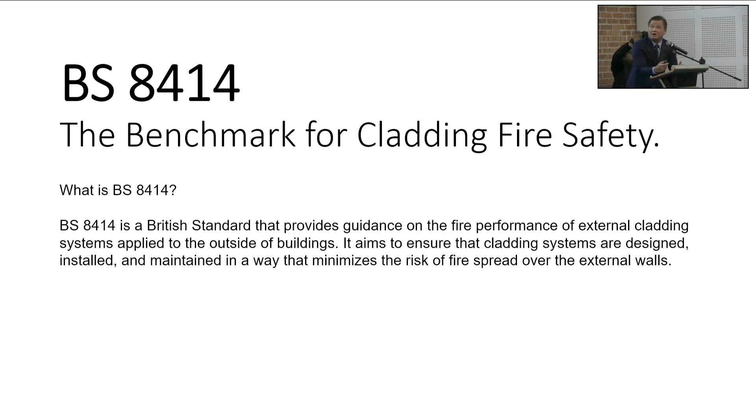Now, why was it implemented? In my next slide, I will show you that it has been gazetted into our law that it has to be adhered to in our UBBL. Why is it so important? What happened is that fires have been occurring in high-rise buildings for the last few years, and probably one of the most popular ones that you have heard of is the Grenfell Tower. Grenfell Tower happened in London, UK in 2017. And in the UK, we always think that they are a modern country that should have enough firefighting systems to stop fire happening in high-rise buildings, right?

So what happened in this building is on 14 June 2017, at 12 midnight, because of just an electric circuit short. From what I learned, it was from the fridge in one of the units, and fire broke out. The fire spread initially in the unit itself, then it spread out to the external wall, and then within an hour, 1.5 hours, the whole external wall caught fire. In the whole incident, 72 people died, and 74 people were injured. So it's a serious matter, right?

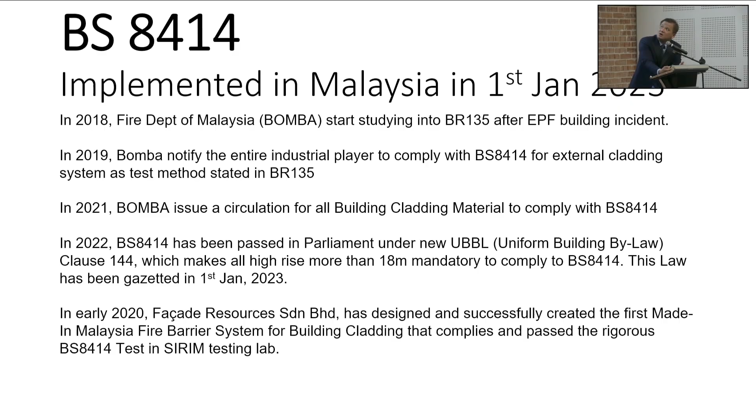For us in Facade Resources, when we were told in 2019 that Bomba was looking at gazetting BS 8414 as one of the requirements for external wall cladding, as an industry player that has been very active for the last 20 years, we felt it necessary to come out with a system that Malaysian industry players can use. And most importantly, it must be effective and economical as well. And that is who we are today with the system.

Now, one of the things that I need you all to know is when you need 8414 and when you don't need 8414, this is also very important. I guess some of the architects here deal with high-rise buildings, some of you don't, right? So one number that I would like you to keep in mind is the number 18. Not because of sweet 18, it's because of 18 meters. As long as your building is above 18 meters, then you need BS 8414 for your external wall cladding. What about below 18 meters? Bomba has requested that below 18 meters, you just need Class O to comply with BS 476 Part 6 and Part 7.

I've seen so many buildings quite nicely done. That's why we have to compliment our local authority. Because I have development in Cambodia, I can share with you, we have buildings that can kiss each other. Basically, my neighbor, I can just extend my hand and shake him. That's how it works in other countries. But luckily, in Malaysia, we don't have that.

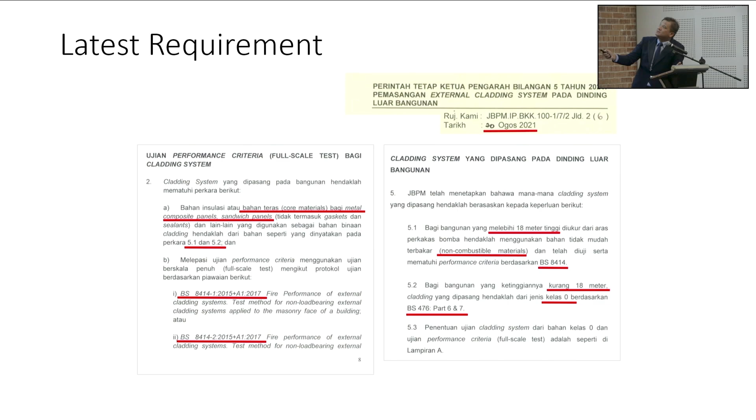So this is the Perintah Tetap Ketua Pengarah Bilangan 5 tahun 2021. This is the Pengarah, and this is where the instruction is. So if you look here, it's stated that for bangunan melebihi 18 meter tinggi, using non-combustible material and berdasarkan BS 8414. If kurang 18 meter, Class O, BS 476 Part 6 and Part 7.

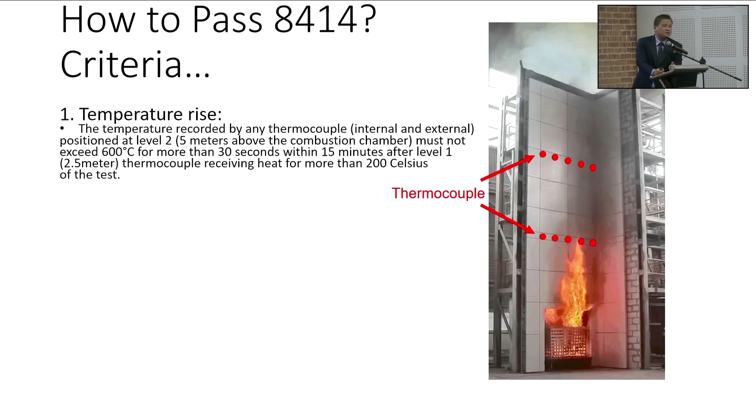So let's say at 7 minutes it goes up but comes down? Yes, as long as it's not for 30 seconds. Just 1 second, tak apa. 2 seconds, tak apa. But if you break 600 degrees Celsius and it registers for more than 30 seconds, then you fail. Understand? A bit technical, but don't worry, I'm here to help. If you don't understand, you can ask the question again later, or you can look for us. But this is how it works. That's the first one.

The second one is the visible flaming. This is more of observation. Basically, they want the whole rig here to literally stay there. The whole test rig is still there, and the fire is still confined within this area.

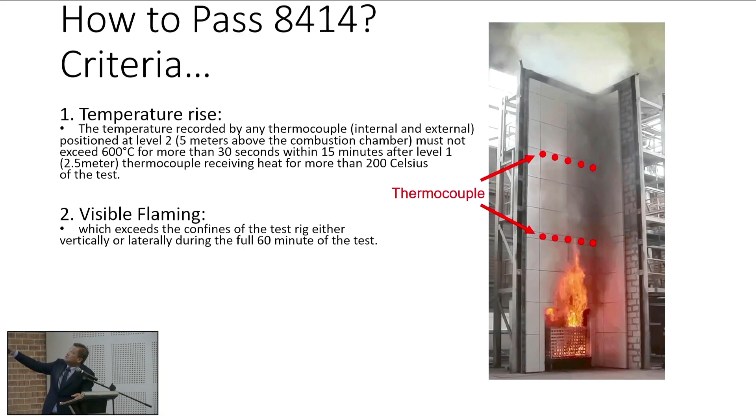It's not like going there or there for 60 minutes during the whole fire test. Next, falling debris. So, as you know, this is a wall cladding. It could be aluminum, it can be steel, it could be anything. So when we burn aluminum at a temperature of more than 300 degrees, it will start to collapse or start to melt. So all the debris will start to come down, especially the part of the system inside that could have something, rock wool, or whatever it is.

It will fall out. So this debris, when you burn, when it falls to this confined area here, continuous flaming debris is not permitted. So it must be able to self-extinguish in 60 seconds. If it drops here, in 60 seconds it must be gone. If after 60 seconds there's still debris, it means you fail.

So why is this important? As mentioned, this is a system test. And imagine this is a building as well, and people are running out of this building. The idea is, first, they don't want this debris to fall on the people. And number two, even if it falls down, it will self-extinguish so that you won't burn the people, providing enough time for the people to leave the building, to run away from the building.

And number four, there is no collapse of the system. So there cannot be more than 500 mm length of product or 200 grams of product, flaming or not, onto the floor of the test facility outside the designated crib zone. So nothing from here should collapse structurally as well. So, clear and simple. If you get that, you got it done, congratulations. You got your BS 8414 complied system test.

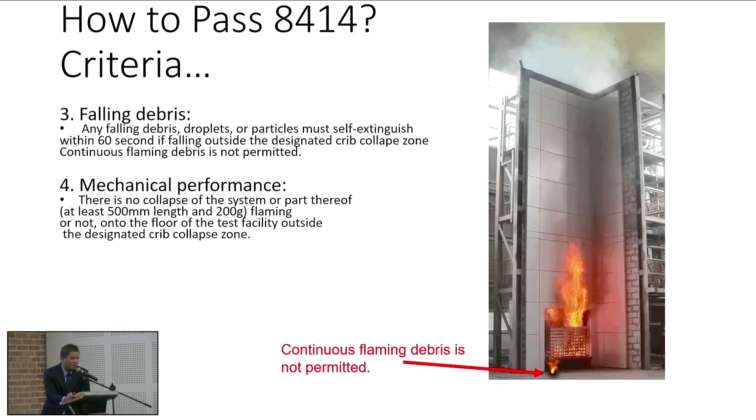Now, I'll just spend the next 5 minutes talking about the idea of 8414. Just like many fire standards or fire tests out there, the idea of 8414 is what we call compartmentalization. Just like when you have class O, when you set up a building internally, sometimes you fix up a firewall or a fire door. What are you trying to do? You're trying to contain the fire spread within the floor. Am I right? That's why you do all this.

In our facade, it's the same thing. We are also trying to compartmentalize, but what we are compartmentalizing is the facade itself. I will have a picture later to show you. But in terms of description, the idea is achieved by dividing the building into separate fire-resistant sections, or what we call compartments. Each compartment is designed to contain a fire for a specific period, allowing time for evacuation and firefighting efforts. So what does it mean? It's this.

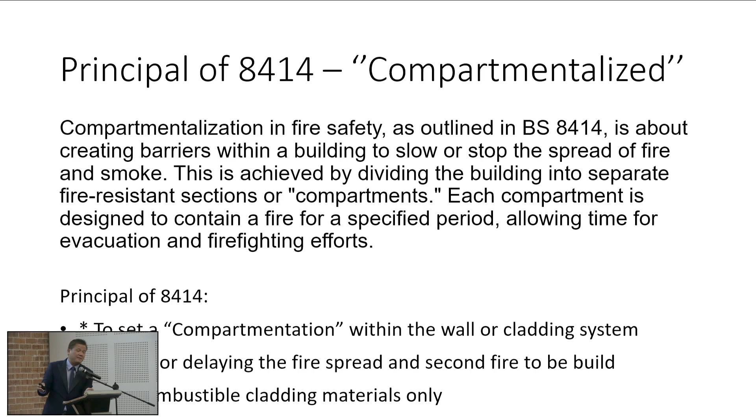So this is just a principle, to set a compartmentation within the wall cladding system, prolonging or delaying the fire spread, and definitely we are using non-combustible materials as well. So this is what I'm trying to say. Look, this is how a building normally works. This is how the facade is. Can you see the green and the red lines?

These are what we call the horizontal barrier and vertical barrier. This is what we are doing. This is our product; the red and the green is our product. So by compartmentalizing this place, when we build this barrier around this area, you basically contain the fire around this area, everywhere. So what is the principle of this compartment? There's a standard to do this, and it's very important for you all to know this.

Why I say it's very important is because in the industry it has been rolled out since 2023. Unfortunately, due to, I won't say lack of knowledge, but probably lack of experience and exposure, we have projects that want to comply with 8414. Yes, they do. But when it comes to the site, they didn't implement it as per the standard. This is how the standard should work. Some people actually have this, but forgot to build this, which is wrong.

So how do you know it's right? We'll talk about the vertical barrier first, which is the easier one, the green one. These are the vertical barriers. So basically, vertical barriers must be installed along all edges of the building.

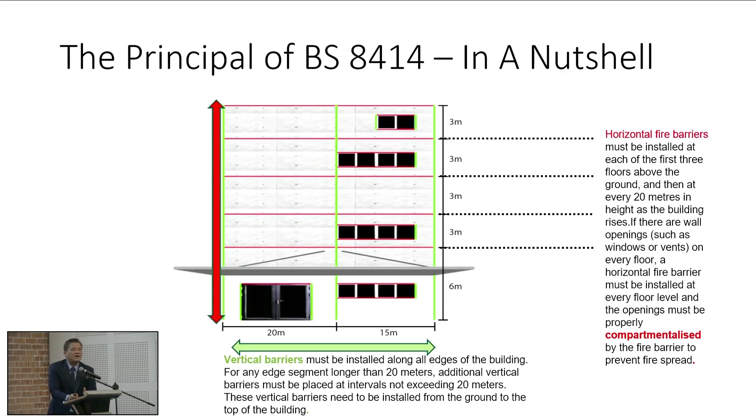So basically what I want to say is, it's easy to know that you are compliant. That's easy. But it's not easy to know whether you are complying correctly. That's the tough part. Because in the industry, there will be some people who interpret wrongly, will give you wrong advice, and tell you, no, you don't need to put here, you just need to put there. And that's all very, very wrong. So if you want to know the right thing, go back to our BS 8414 manual.

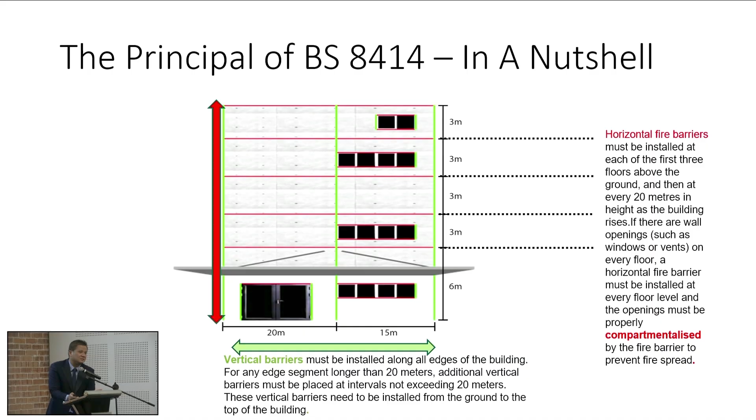So, okay, let's go to the next slide. So, why is compartmentalization so important? That's how it works. Can you see the fire? When you compartmentalize properly, we just tried a demo. You can see the fire is being contained. It's not spreading out. And that's the idea of it.

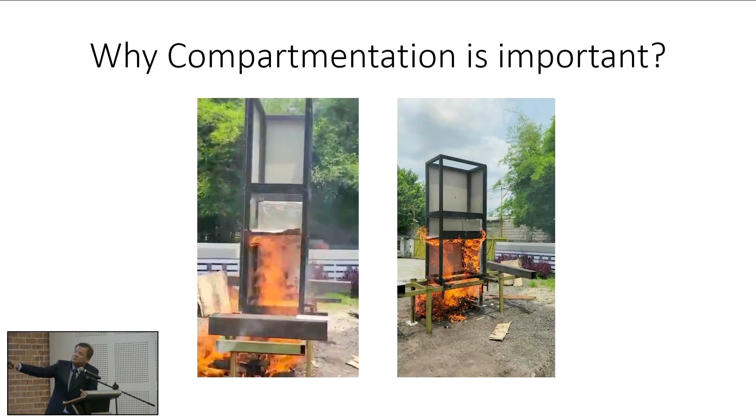All right? Because along this, we've put in some intumescent as well, the fire blocker, and we have some rock wool around this compartment. All right? So after burning, can you see? This is the intumescent that we had. So just to show you how it works. I forgot the picture, sorry.

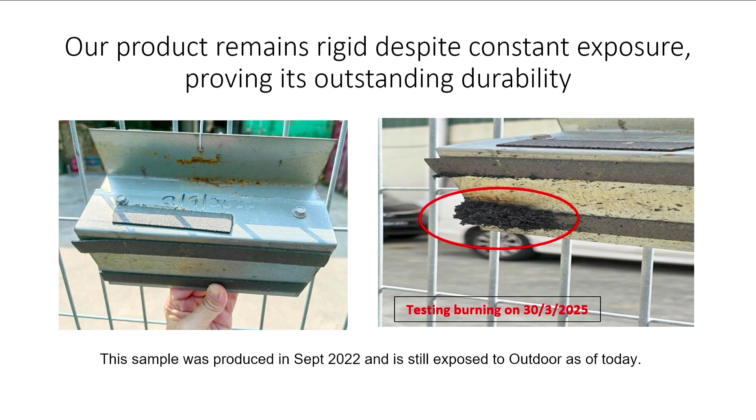So basically, this is our product that we took a picture of 3 years ago, September 2022. This is a picture we took just a few months ago. So once we do a test burn, this is how it looks. Okay, so this is the intumescent. Once it burns, it will grow when it heats, if I'm not mistaken, sorry, I cannot remember the temperature.

If I'm not mistaken, it's about 150 degrees Celsius. Then it will start to expand. If I'm not mistaken, I need to check back my data. So sorry about that. So when it expands, then it will become like this, and it will actually fill the gap. I will show you later in a drawing why it is important to have this intumescent.

Now, why I want to show you this photo is because of this. Can you see, this is the product that we have? Our product is very rigid. What do you mean by rigid? When we install this product on the actual site, sometimes in Malaysia you don't know what will happen, delay in payment, all these project delays, you know.

Sorry, so many la, right? Our Italian friend doesn't know what la means. But la is our culture in English.

Anyway, what I want to say is there's delay in projects. When there's delay in a project, this product will be exposed on site for some time. Imagine if it's 3 years later, how it looks. Because our product is very rigid, because it's made of steel, after 3 years you can see our steel is still very much intact. Basically, if this product is exposed for the next 3 years on site, there's no problem.

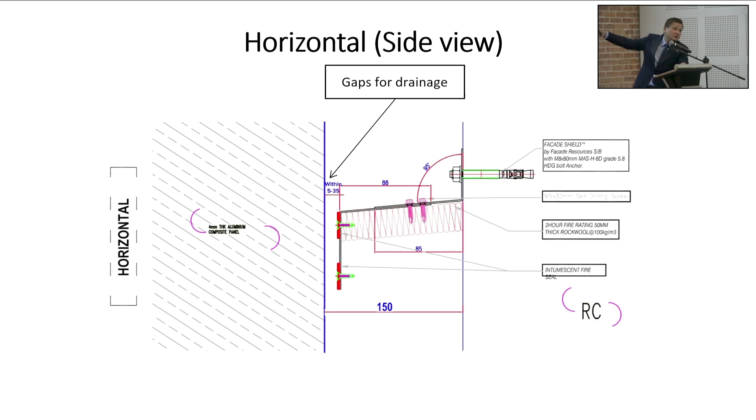This is how it really works. This is basically the barrier that you saw just now. This is the horizontal barrier. The way we design it is like a Z plate. The reason why we have a Z plate is because we want to be able to move freely. This is a barrier of 150. If, let's say, I have a 130 barrier, then I can just adjust the length here. So my product becomes very flexible and rigid.

Flexible in the sense that if you have a barrier like 130, I can just adjust accordingly by buying just one type of product. You don't need to buy 2 or 3 different products. But if today you have another product based on rock wool, you need to cut. We don't need to cut. We are there already, because we can adjust. And can you see the gap? We leave 5 to 35 mm.

This is the aluminum cladding. This is the aluminum panel. This is the wall. This is the barrier I'm talking about that you need to put inside the building. Just now, all the green and the red, right? This is the red one. So this is our intumescent. Why we leave this gap is that we want to create a rain screen effect. So, say, if water goes into this system, it can actually flow down through the wall cladding system, so it won't flood the system.

Have you heard of buildings where, once you clad already, suddenly the building becomes like pregnant? Have you seen it before? Why? Because water seeps in and it becomes pregnant. In Chinese, you call it DATO. So this is what we want to do. This is how we overcome it.

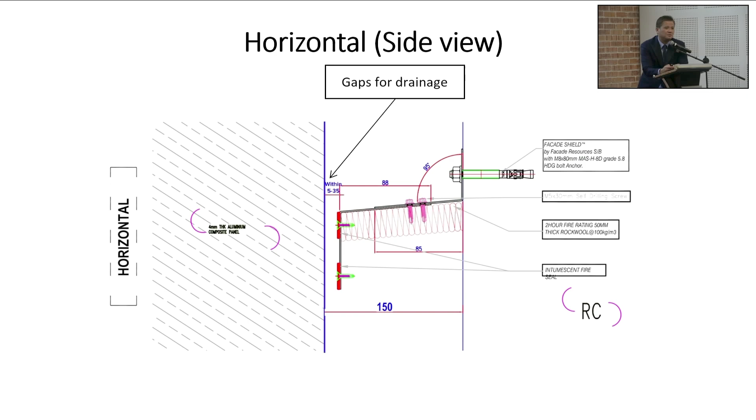This intumescent is only 2 mm, but when it burns, it will actually expand 20 times. So when our gap is 5 to 35 mm, will we be able to fill the gap? Yes. So the idea is, when there's no fire, the water can flow freely. When there is fire, the water doesn't matter anymore. You need to stop the fire. So you need this to pinch, close the gap, so that the fire is contained under this area. That's the idea. Very simple. But a lot of engineering and ideas have been put in.

And for the vertical, being vertical, you don't need the rain screen effect, so we can just fill the gap straight away. We have rock wool here, and there's no intumescent needed because it's dead anyway. It's like a compartment as well.

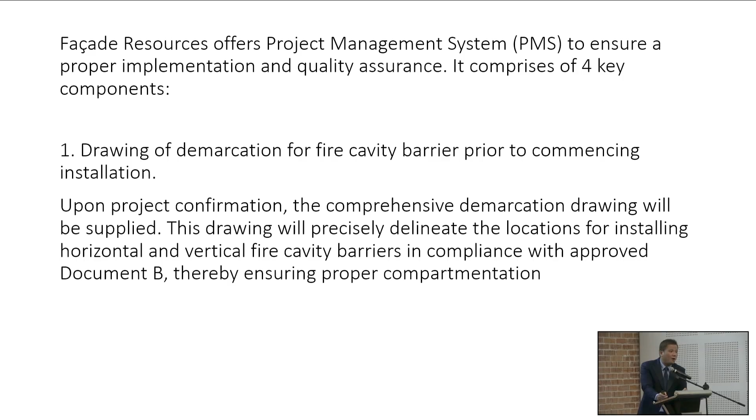Okay. So, what do we do in Facade Resources? As I say, the idea of 8414 is very, very simple. But did you get it right? And this is where we're going to help you. If you look for us, we'll make sure that the projects that you do are being demarcated properly. This is what we're going to do. We are with the Approved Document B as well, therefore ensure proper compartmentation. Okay? This is how it works. We'll do this for you.

So if you have a job, 18 meters and above, you need 8414.

We'll do this. Whether it's free of charge or not, give us the order, then we free of charge. No. For friendship, free of charge, I say. Okay? But I'm just joking.

Anyway, what I want to say is, this is very important. This is super, super important. Because I can tell you, in the market, a lot of people don't do this for you. Number one, the reason they don't want to do this for you is because they want to find ways to save money. And we're not going to do that. We're going to tell you this is where you're supposed to put your barrier, this is where you put your red one, this is where you put your green one, and you must do it. If you don't do it, then we're not going to give you the warranty.

All right? Remember, this is a very good business. I'm a special architect as well. You guys are the C2, right? Are you the C2 or C1? Who's the C1 already? Let me remember. C3. Okay? The material supplier, me, is C1. So if they don't follow this, I don't sign them. I don't sign them, they can't get their CCC. They don't get their CCC, that's their problem. So it's very important that this is being done properly.

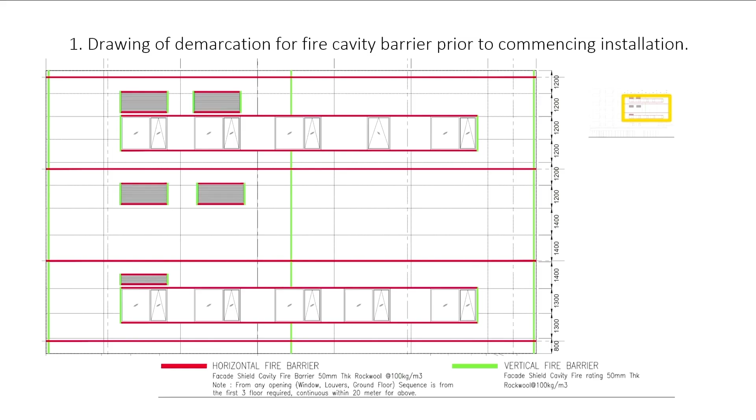Okay? So, as mentioned, we also do a cavity barrier review. We do work with some fire consultants as well to provide a report if, let's say, you need. Okay? And this is also important. We also do a QA QC report for the product that you choose. I think in wall cladding in Malaysia, most of the time they will use composite panel, if I'm not mistaken. But recently, solid aluminum is taking a lot of center stage as well. So we're going to do a QA QC of the solid panel and the composite panel as well.

The reason why we can do this is because of our background. Actually, Facade Resources was an agent for a few brands of composite panel before we decided to move into the fire cavity business. Now we no longer are, because we want to stand neutral. We have a lot of suppliers that work with us, which later I will show you, all the brands that work with us, which we have certificates with. And we're going to do a full detailed report on how good their products are.

Okay? And definitely number 4, which is very important, we're going to do a regular site inspection for you. This is part of our promise, and this is part of our job. You know, when we say regular, very simple, Dato, you just say regular. What is regular? I can tell you, we have a job, less than 100K of supply. It's in JB. We went down there 5 times. Less than 100K, went down there 5 times. When you divide, it's only 20K one time, but you must know we have costs as well. So this is what I want to tell you, how important it is to us that everything is done properly.

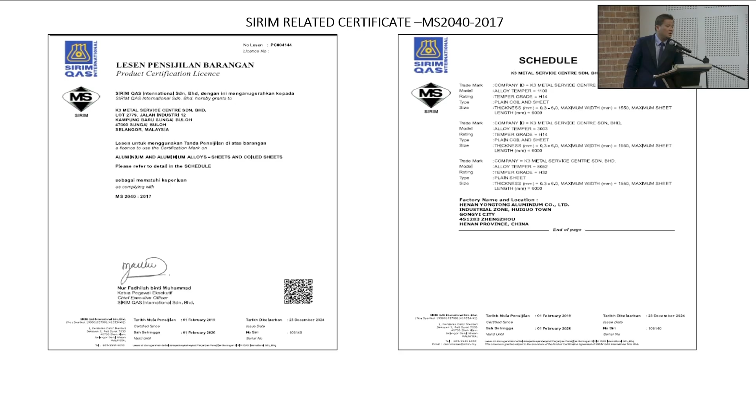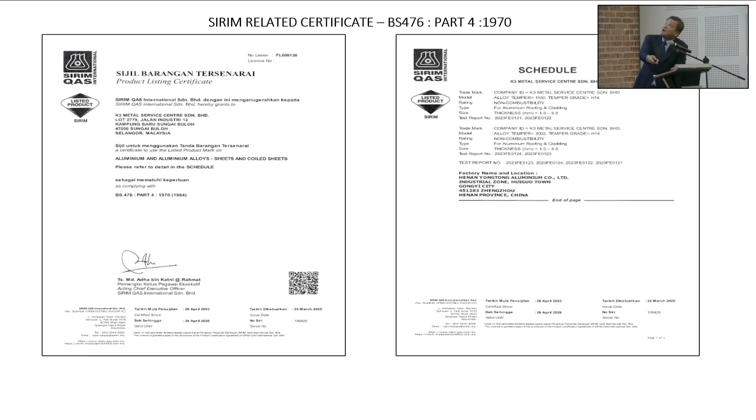Another very important thing you need to know is this: MS 2040. Recently a lot of projects are using solid sheet. Make sure their solid sheet has 2040 as well, because it's a Malaysian standard. With the 2040 you can have the schedule, therefore you can have BS 476 Part 4 as well. This is additional fire testing we do. And this is Class O, BS 476 Part 6 and Part 7, K3 aluminum. Passed. This is the date.

Bomba certificate. Why do we need this? Because all construction material must have PPS. A lot of people will tell you, I sell solid sheet, I have this and that. No, ask them: do you have CIDB, PPS? Do you have Part 6, Part 7? Do you have MS 2040? That's very important, because only with this whole set are you certified. And we use this product in our BS 8414 testing. This is just some of the documents.

Another thing I'd like to highlight: if you don't know whether the many certs out there are real or not, very simple. Go to the SIRIM website. There is a number on the cert. Just check. Definitely some people are going to do a lot of magic business here, I know. Just check from there. This is where I highlight the two parameters, 435 and 100, the minimum and maximum.

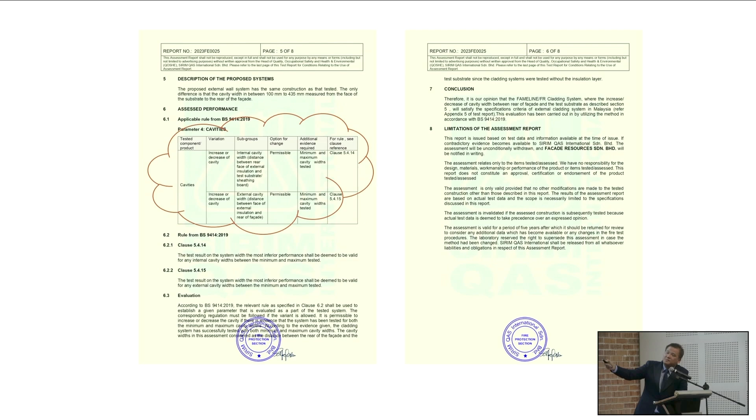Do you have time? How long do we have? Oh, 5 minutes. Can I? Okay. Just 2 minutes more.

This project is very unique. You know why? They got their CCC in 2018. Imagine, you already got the certificate. Everybody started to stay inside already. Then suddenly, they try to change some of the facade system because of a design issue. So the architect reissued and resubmitted. When resubmitted, it falls to 2019, then into 2020. What happened in 2020? The government says, I want to see your 8414 standard. But the building is already up. What to do?

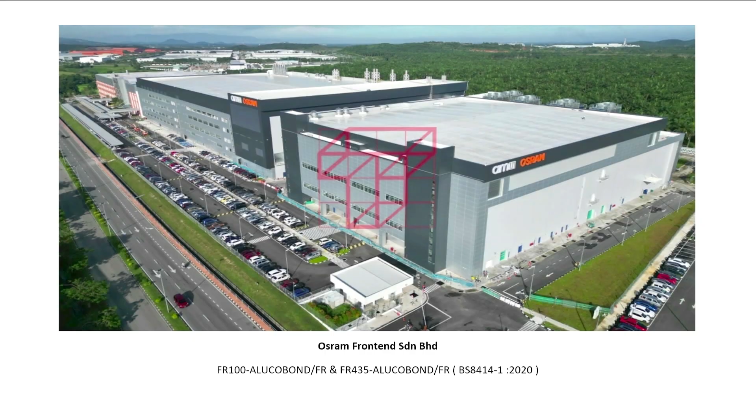This is Osram. And I think recently there's a lot of data center inquiry as well, right? So what about data centers, you ask us? I'm going to answer you very easy. If it's 18 meters and above, you need it. If it's below 18 meters, you don't need it. So if you want to save money, tell your owner, build 17.5.

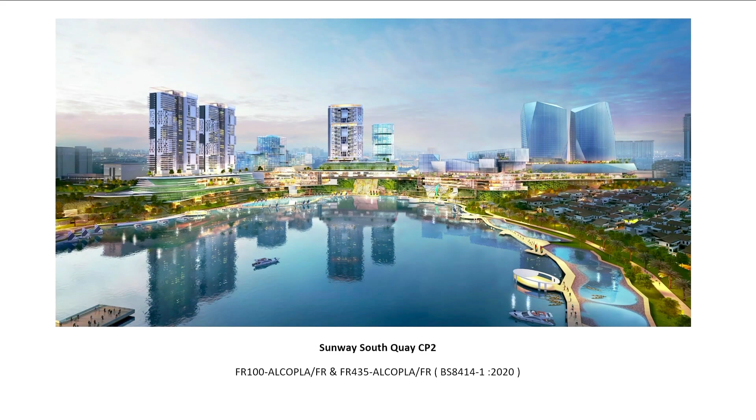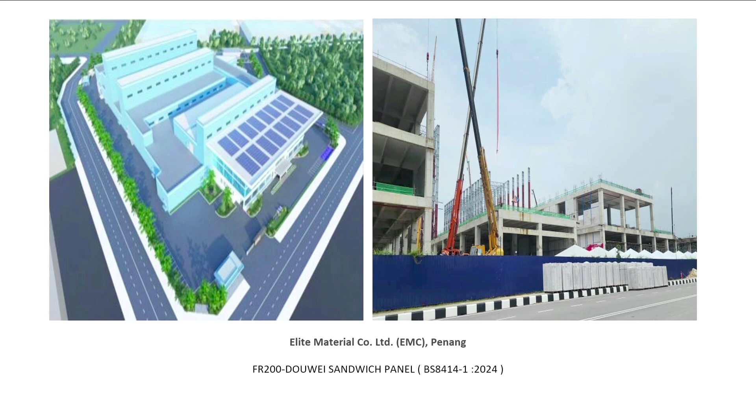They did a refurbishment. Okay, this is a very important thing that I'd like to highlight to everyone here as well. What I come to know is that Bomba is now looking at a lot of old buildings that need to be certified with BS 8414, or at least Class O, Part 6, Part 7. Because a lot of buildings built pre-1998, more than 18 meters, have no certificate at all on any fire testing. So now Bomba is looking at it.

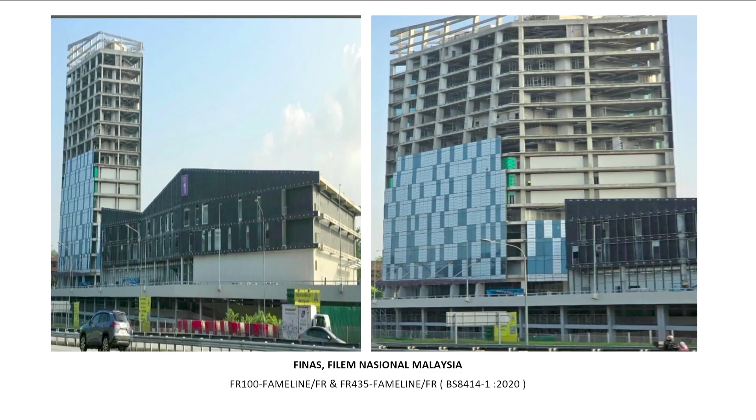So I just want to say this to you all because you're looking at a lot of job opportunity here for the architects. If you have a lot of friends, owners of 20, 30 year old buildings that need to rebuild, because they need to have this new certificate. If they don't, they're going to be paying a lot of premium in insurance, because it's not going to be considered a compliant building. All right?

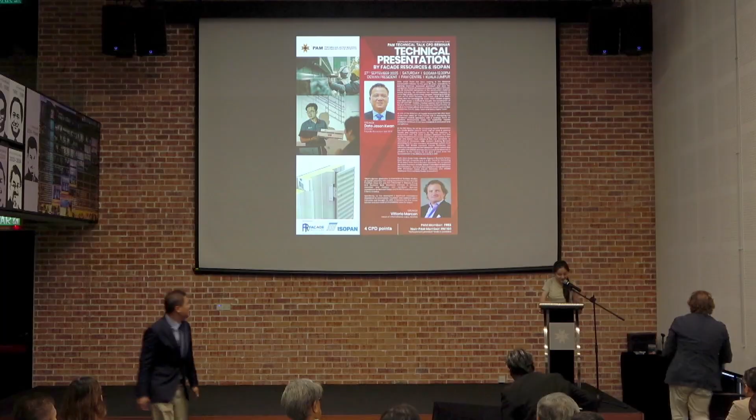Vittorio Marcon graduated in International Business Studies at Cardiff University with visiting experiences at NYU and EBS Frankfurt. Since the very first internships in Marzotto Group and Deutsche Bank, he developed interest in different industries and markets, with significant business experiences for Berndorf Group and Hirsch Group in Europe and North America. Specifically, he developed a significant international experience in construction, insulation, and sandwich panel industries, and brought his skills to become the first senior advisor and then head of international sales for ISOPAN.

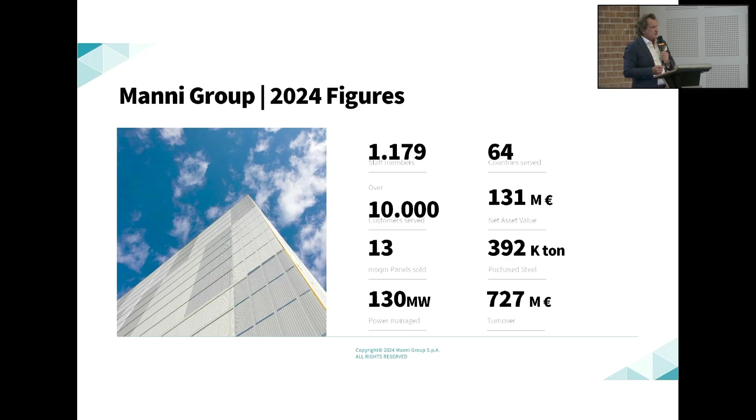In terms of sandwich panel, last year we delivered over 13 million square meters of sandwich panels. We process a lot of steel, both for sandwich panel and steel construction. Just to give you a glance, last year we processed altogether almost 400,000 tons of steel. And we developed a turnover of roughly 727 million euro.

Okay, here we are. Just a glance on ISOPAN and Manni Group. There are several companies within Manni Group. Manni Sipre is dedicated to steel fabrication and is one of the largest service centers for steel products in Europe. Manni Inox is focused on stainless steel application, trading and services. Manni Green Tech is a company developing its own philosophy of construction based on light steel frame applications.

And then there's ISOPAN, which you will get a special glance at later. And Manni Energy is taking care of designing, engineering, putting together and managing renewable energy applications. Here, let's go to ISOPAN. ISOPAN is one of the largest sandwich panel manufacturers worldwide, and we name it Building Envelope Solutions. And the mission is to fulfill the purpose of a responsible building concept, considering the well-being of the occupants and the positive externality of all the stakeholders in the community.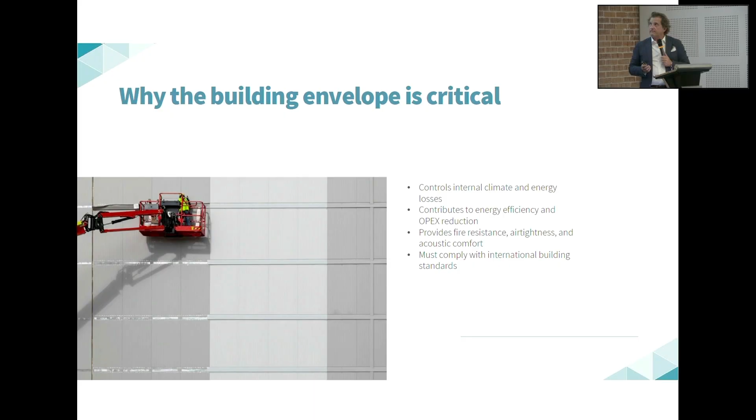Here we come with the certification: building protection with proven performances. The panels that ISOPAN manufactures are compliant with European fire protection norms, and as well with Factory Mutual approved sandwich panel regulation, both for PIR and mineral wool core panels, even if the focus is now mainly on mineral wool.

Just for your information, out of the 15 million square meters of sandwich panel production, we can adopt basically most of the well-known insulation materials, starting from the basic PUR, getting into PIR, with ultra-performing features in terms of insulation, and then we have rock wool, and we still have some glass wool application. Rock wool material is clearly well known for its fire performance, but we will see the details later on. Factory Mutual is very well known worldwide, and we have several times come across the need to fulfill their requirements.

A lot of attention as well to leading green building certification. ISOPAN is compliant with LEED, or can help to reach the LEED standards and BREEAM standards. We have very updated EPDs. We do have the Singapore Green Building Council approval with the leader flag, which is quite important. And the use of sandwich panels, once again, is very important to increase energy efficiency and to ensure responsible material use and support for integrative process and indoor environmental quality.

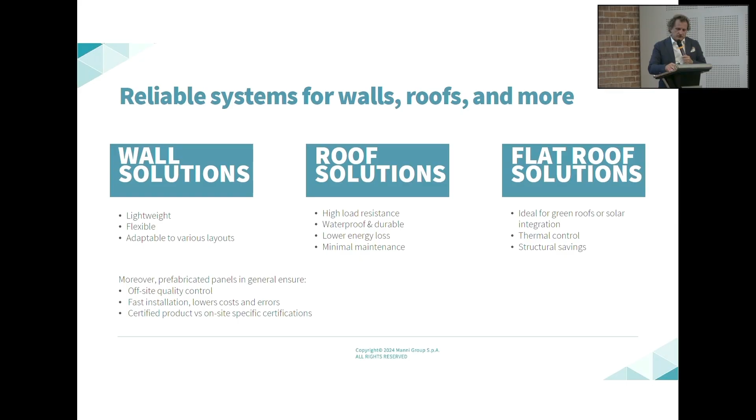Built for performance, designed for the planet. Wow, big one.

What can the sandwich panel ensure? Water and air tightness, for sure, both on roofing and vertical wall applications. The pre-painted skins, as I was telling you, are made for aesthetic durability and corrosion resistance, and give flexibility to the design as well, because there is a really wide color range, also for branding visibility. In terms of corrosion resistance, we can reach RC5 class, just to name it. So really the very top performance of what is currently needed.

98% of the materials composing the panels are recyclable. So when we imagine being at the end of the building's life, we know we are talking about materials that can pretty much be recycled, which, as you very well know, is very important.

The sound absorption performances are pretty good, especially in the phono version, the acoustic version. We have also achieved the classification for burglary resistance. We reach class RC3 of burglary resistance. It's an important element for every kind of building, and for data centers as well it's quite important.

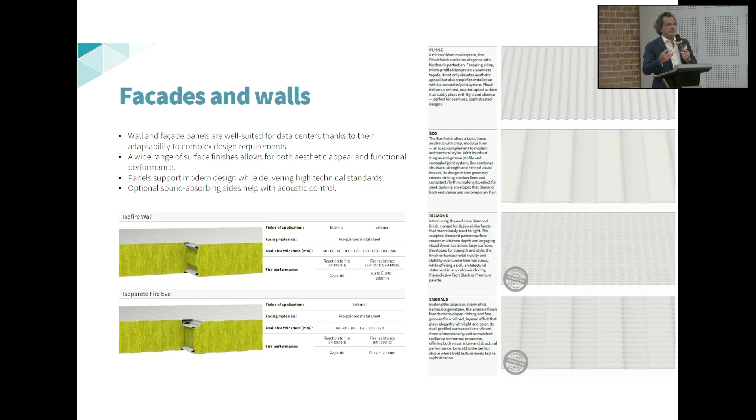Here you have a picture where you can see how they look different, what I was telling you. This is diamond, this is emerald. Actually, this is all the diamond surface. They can look pretty nice, huh?

Because you can perceive this design when you are close by, but once you get distant from the building, it looks flat. It appears flat, but it's not flat, because being flat always hides a lot of risks for the stability of the metal material.

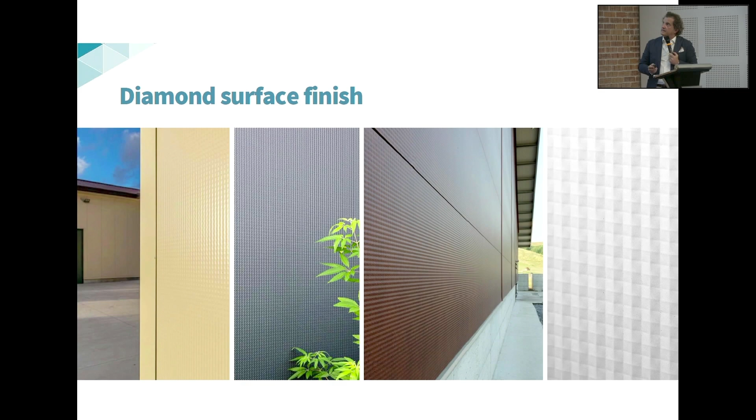Okay. Roof and flat roof. The sandwich panel gets engineered and designed for this kind of installation, so to be installed on a pitched roof. Regularly, the common sense is to have a roof with at least 5 to 7 degrees pitch, in order to ensure the proper water performance.

But we developed a technology to ensure good performance in terms of horizontal application in a flat roof configuration. So in this case, as you see, the waves, the crowns, whatever you want to name it, are on their way up. And the performance is here as well. We can reach 200 millimeters in terms of thickness with all the consequent thermal performance.

We are talking about an element which is in A2 S1D0 class, so non-combustible, very little smoke and no dripping, and up to, in this case, 240 millimeters. I'm sorry, there is a mistake here, because for the roof we are talking about REI performance. So there is the mechanical component as well, the R factor. So this is something that will have to be adjusted.

It's not on. Okay, so let's gather our thoughts.

Perhaps for most of you, it's been a while since you sat Part 3. Yeah? All right? Those of us, alumni, USM, Studio 400, Studio 500, we've gone through professional practice. We've gone through coursework, talking about the UBBL, Contracts Act, PAM form of contract, all right? But the way the education is at the moment, a lot of the graduates and people coming into the industry are not taught this, all right? So there is a disconnect in know-how. When there's a disconnect in know-how, you need to frame your thought as to how to approach this matter.

If I were to ask any one of you now, what's the structure of the UBBL, I think a lot will struggle. So what I'm sharing with you now is how, when Chi Suting started the practice and I was invited in, 30-over years ago, we had the benefit and also the privilege and of course the sheer good luck of having a steady stream of projects. So what we are doing now is, with whatever experience we have throughout the decades, try to streamline a way of thinking so that it's easier for you to approach certain subjects.

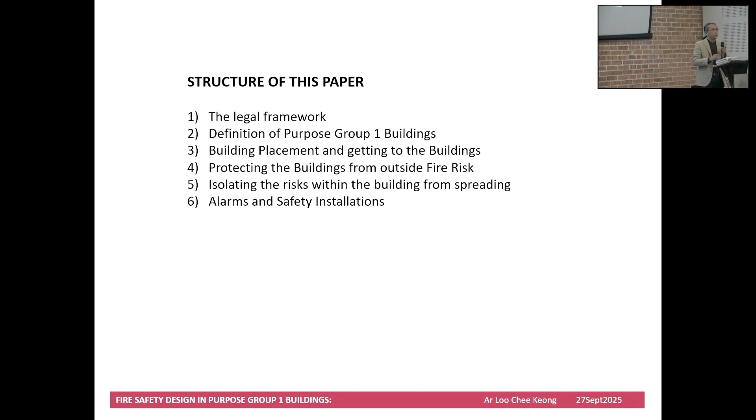The people who fight fire, what is their mindset with regards to your building? Number 4, you have your building. How do you protect that building from fire risk from outside? Number 5, how do you then avoid your building from burning your neighbor when it catches fire? Then only the last item is, what are then the laws in place for you to equip the building with alarms and safety installation, right?

Now, this is fundamental. Those of you who attended the Bomba Road show, it's ongoing at the moment. We just concluded Selangor. We are going over to Kuantan. Then we are going over to Kota Baru, KK, Johor, and then back to Selangor again. So those of you who have not attended, 2 days workshop, very concise. The whole Red Book gets dissected. And we also have Bomba officers who will come in, who will give you that little nugget of information.

The last one that we had in KL, a couple of things very, very important. Number 1, what Dato Jason has rightly pointed out, 8414, certification. Be very careful with certification. There are a lot of cases of fraud now. Yeah, a lot of suppliers are printing their own certificates. Okay, so be careful with that.

And then the other thing that Bomba wants to highlight to us as an institute, for building submissions, whether with or without system, Purpose Group 1 essentially hardly have any system, all right? The failure rate of submission approvals, close to 50%. Means half the people submitting applications to Bomba do not know what they are doing. All right?

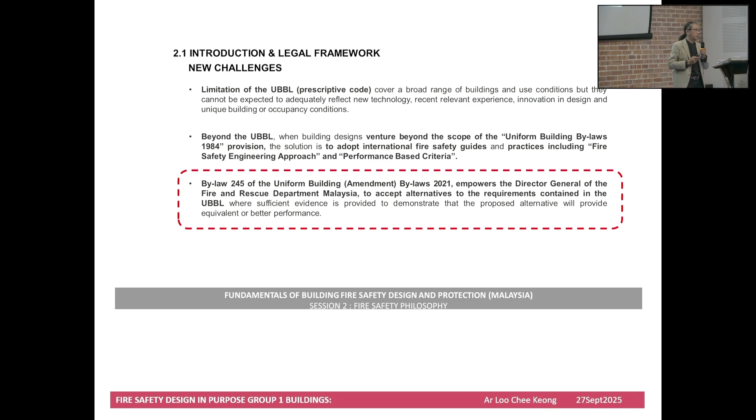When they reach out to stakeholders, a lot of the times, unfortunately, in this government or in whatever past government that we have, civil servants do not put a high enough regard on stakeholders' input. That is the unfortunate part. But is the intention correct? The intention is correct. But if you don't get enough inputs, you never get a more aligned legal update. Yeah? Okay.

We are clear with the legal framework. So now, your point of reference is where? The Uniform Building Bylaw, which is a sub-legal document from the Street, Drainage and Building Act. And now you have Bomba Circular telling you, please follow. All right? So now let's go into what we know as Purpose Group 1.

If you came out to practice in the 90s, it's very different from today, what Purpose Group 1 buildings are. Purpose Group essentially is in the bylaw with reference to the 5th schedule. And if you look at the 5th schedule, the 6th schedule, and the 7th schedule, they all have little information about Purpose Group 1 buildings.

Those of you who have probably forgotten the format of the Uniform Building Bylaw: Part 1, demolish. Part 2, how to submit plans. Part 3, temporary buildings. Part 4, I hope I'm correct, space, light, ventilation. Then structural requirement. Then constructional requirement. Then 7 and 8, Bomba. So if you talk about firefighting, 7 and 8, right? Only 7 and 8, but not really true.

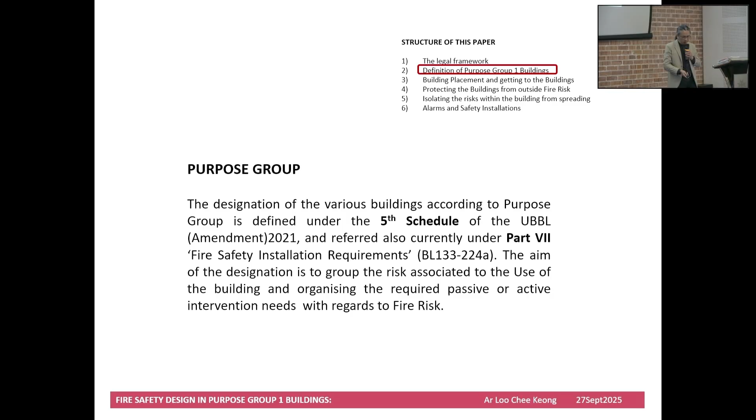Okay? So in purpose group, first of all is to define the purpose group. Purpose group is basically a definition on complexity and fire risk. So what actually are Purpose Group 1 buildings? 134 says all buildings refer to Purpose Group. But Bylaw 256 is located where? Part 8. It says, except for 134, 141 paragraph 2, or Bylaw 225 and 227, every other thing doesn't apply. Meaning, take Part 7, take Part 8, throw it away. You don't have to think about it.

But if you look at this, 134 is talking about follow purpose group. Paragraph 2 talks about what? Separating walls. Party wall is part of separating walls. 2012 threw away the party wall. Separating wall clauses are in 141, which is Part 7. So do I need to comply? I still need to comply. The only thing is the law at that point in time has forgotten how to define a party wall. All right?

225, hydrants. Just placement of hydrants. MS 1489 is essentially the technical part of hydrants. Nowhere in this document tells you how to get to the hydrants. All right? 227, later Part 8, essentially are alarms and active firefighting systems, how to fight fire from within the building. So for Purpose Group 1 buildings, this is an overriding bylaw clause.

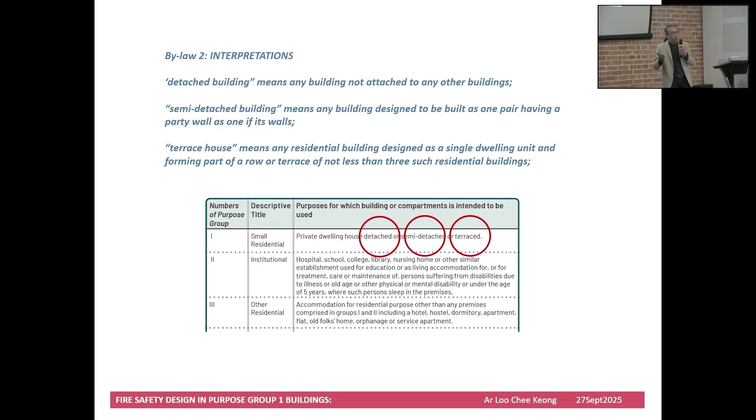Now, those of you who have your old UBBL, go and see what it says in Purpose Group 1. Purpose Group 1 will basically have something in bracket: does not include flats, does not include terrace houses. So what does it mean? If you do a terrace house, not a Purpose Group 1 building, go through all of 7 and 8.

Inside 7 and 8, there is a travel distance limit, isn't it? So if you want to comply at that point in time, 10-meter dead end, all our terrace houses don't work. Right?

Up. Why is it flashing? Okay.

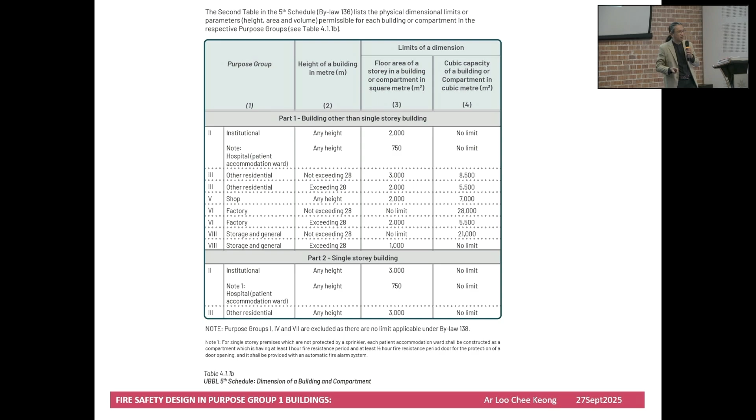Okay, we were here, and now we are here. Second table in the 5th schedule. It tells you the compartment limit. If you look at, hey, where's purpose group 1? It's down here, no limit. You can build the size of a palace. It's still a purpose group 1 building, because there's no limit. All right? But then there are other things which are going to limit you from doing that. This is clear, huh? Okay.

So now, a couple of questions. Ask yourself, if you do a detached house, you're fine. Villas, bungalows, 1 story, 2 stories, still fine. 3 stories, probably still fine, right? Local council still allows you to submit, but local council doesn't care whether it's purpose group 1 or what. Bomba cares, right? And there is a reason why it's 3 stories. Why not allow you 4 stories? Because the bylaw says if you want to go more than 4 stories, please give me 2 staircases, right?

And not only that, there are other schedules that are going to limit you, and you will not try to have 4-story residential houses. All right? Link houses, not a problem. Those of you doing cluster housing, is it still purpose group 1? It's linked. Still comply, right? Should be, right? You didn't run afoul of the definition, correct?

Next, partition housing. Do you know what partition housing is? Essentially, it's 1 piece of land, 1 title. You apply to the National Land Code, cut it in the middle, 2 owners. Strata title is overlapping, right? On space. There is something in the National Land Code that a lot of people don't use. We call it partition housing. We've done this before in the 90s in Selangor.

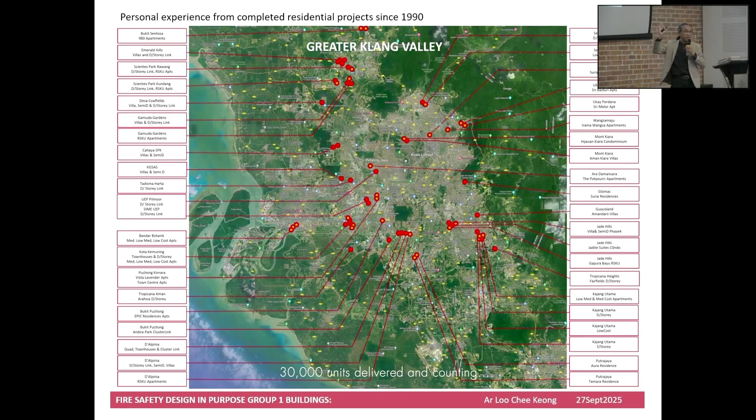Okay, I'm going to flash you very quickly what we went through and how we summarized this paper. ARC, in Klang Valley itself, there's close to 30,000 houses that we've delivered. All right, just in Klang Valley alone. So some of the summary that we have, even like partition housing, the first landed strata bungalows in Malaysia, we actually helped a lot in the early formation of the legal requirements. Yeah.

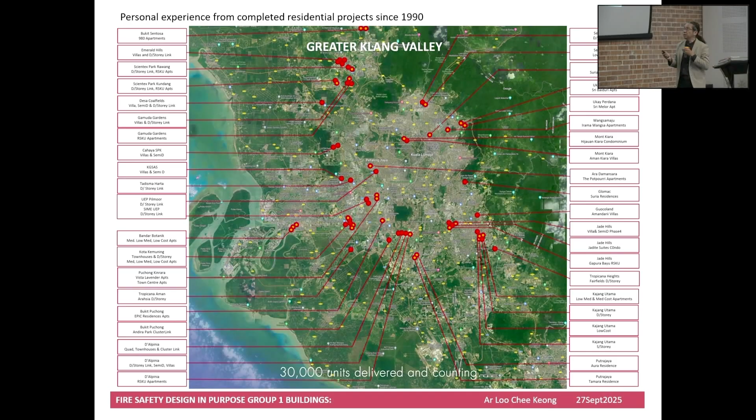We've done all sorts. You're front-facing, you're back-facing. Within a gated community, is it still Purpose Group 1? Landed strata, is it still Purpose Group 1? The answer is yes. The National Land Code and how we deal with strata title has nothing to do with how we fight fire. Yeah? Different facades, still the same, right?

But there are other rules that you need to take into consideration with regards to fire risk to your neighbor. You're not dealing with one design, you know. The window placement is going to affect the next neighbor. You give it to your draftsman and assume that he knows it; he doesn't know it. So please design it properly. So what about alternating facades? You've got semi-Ds trying to look like bungalows. How do you deal with the party wall? Right? Do you still comply with the same rules as Purpose Group 1? All right?

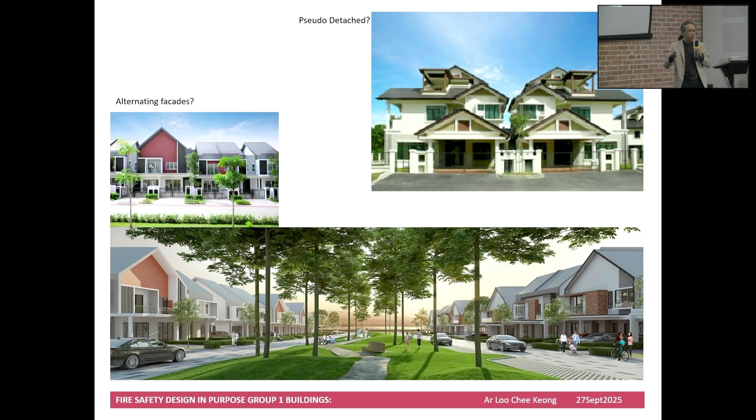Individual bungalows. The other picture I'm showing you is because I will have the same problem like you guys. You go to KL, you submit to an officer, he will say one thing. You go to JB, you submit to a different officer, he will say a different thing. All right? That's why the red book is very important.

I will again also illustrate examples of how you deal with it later. Perhaps you can get your approvals a little bit faster. But touch wood, at this moment, 30 over years we've been doing it, not too bad. They are not unreasonable people if you stand your ground and you know what you're talking about.

All right? For a lot more complicated buildings, we now submit approvals with a Bomba report. The Bomba report basically tries to paint the way how he thinks. So if I were to submit a building, I'll illustrate the point also, then perhaps it helps you. We have that as part and parcel of the roadshow to make the approval process a bit easier.

This particular project was a cluster housing, no back lane. Can or cannot? You need it as a fire break or not? You need it as a fire escape or not? I don't know. What do you think? What are the back lanes for? Because it is Purpose Group 1, you don't need a back lane.

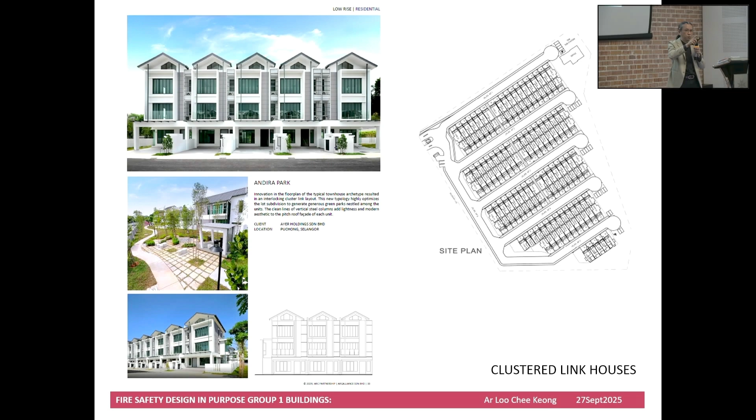So everything has to be stratified. Okay, you do a strata scheme like this, then yes. Then what about your roads? How wide are they supposed to be? Okay, I'm not just talking about single buildings. Some of you are doing planning on Purpose Group 1 submissions. Yeah.

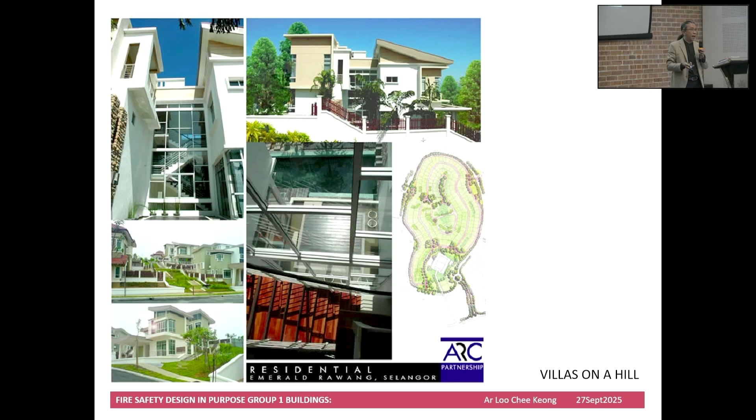What about bungalows that have utility lanes at the back? Actually, if you have bungalows on a hill with utilities at the back, it improves the fire risk. It improves. There's less risk, so there is no issue. You still comply with the general description of what a Purpose Group 1 building is.

All right? Now, this is the first landed strata bungalow that we did, back, I think probably 2004, two decades ago. That time we were in close liaison with the Federal Territories Land Office, because at that moment they really didn't know how to do it. How do you parcelize the accessory parcels? Where's the principal parcel? Where is the common property? So eventually it got done. So now it's all over town. You can actually do something like that now.

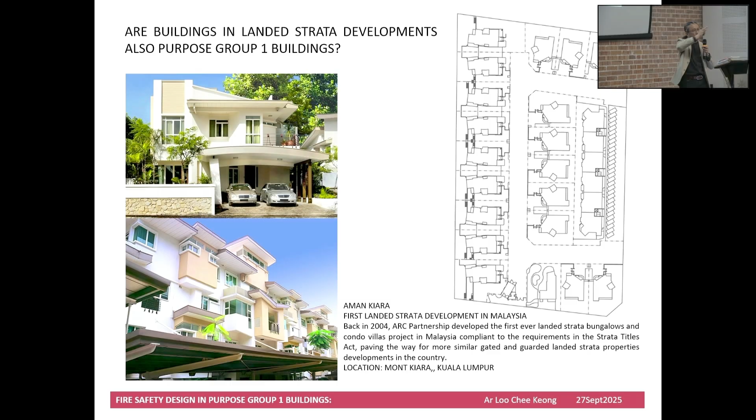Okay, then of course within one community, or rather in a township, we will now zoom into the next aspect of planning for Purpose Group 1 buildings. Okay, 20 minutes in. That's fine. So, let's summarize. Private dwellings.

Old folks home, can or not? The law says cannot. You do renovation for orphanages, also cannot. That's under group 3 or group 2, other residential. Why? Fire risk. You're dealing with people who are less able. So they will not give you the same consideration compared to you who stay in the house and know the house inside out, and you can get up and you can walk.

Old folks homes, orphanages cannot. Not the same amount of ability to run out in case of fire. So the requirements will be a lot more stringent. Yeah? So, 3 conditions. Not limited in size.

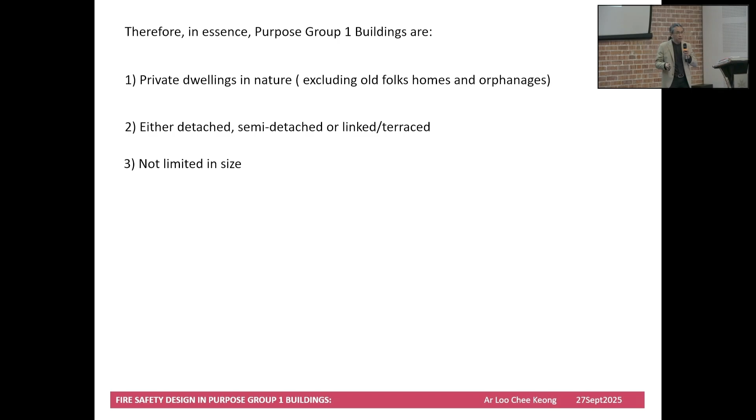And then you look at bylaw 194, single staircase. Because there's a limit. You go up more than 4 stories, and we hardly build a single residence with more than 1 staircase. Yeah? Can we not do it? Yes, you can. Then basically you may comply already.

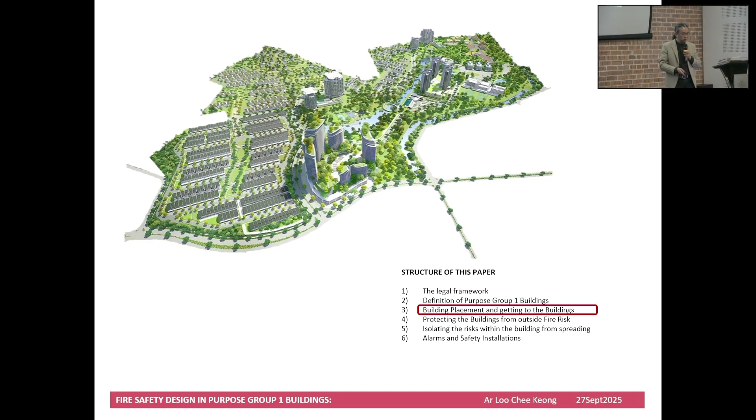But the funny thing is, when you look at bylaw 256 just now, the exception clause, no exclusion, what's the end limit? Right? Now, I will illustrate why it becomes very, very complicated. Okay, building placement and getting to the building. Let's talk about how to approach a building now.

All right? Bylaw 140, fire appliances access. How to get to the building. This particular bylaw talks about 3A to 3I. The road that you've got to prepare to get to your building is 6 meters wide. It must be able to stand the weight of the firefighting tender, 30 tons. It must basically be placed, this is new, 2 meters away from the access opening.

Then you scratch your head. What is access opening? Okay? What it means is every building, wherever is the wall, there's one opening, for either Bomba to get in or people to get out. Right?

Item D. The road that you're preparing is either 1:15 or 1:9. So what is the conventional difference between these 2 gradients? 1:15 is where I, as a Bomba officer, can park my truck, put on my hose. My truck is stable, not on an incline. I'm pulling out the hose, I'm fighting fire. 1:9, I'm not fighting fire there, but I'm using that road to get to the 1:15. Okay?

Then, if you have a row of houses, you can have until 46 meters until you give me a turning design. The dead end becomes a cul-de-sac with a turning facility. All right? And the turning radius, 3F, is determined by Bomba, how you design it. There were circulars in the past. There was the 2nd edition, which gives you some examples, but we've fine-tuned it even further.

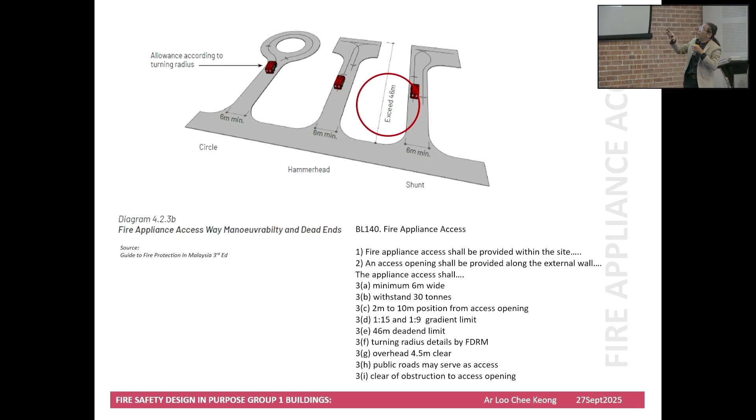In more related items, this is an extraction from the Red Book. Please see the examples. Here, when we draw something like that, you'll be scratching your head: if I'm in a row of link houses, how am I going to apply this? Don't tell me I'm supposed to give this roundabout, right? No developer in town is going to allow you to do that. You're just wasting land. Okay? But the requirements are there. When it's hammerhead, these are the requirements. So how do you adapt? How do you adopt?

Lot, 50 feet or 40 feet road reserve, 12 meter or 15 meter to those who are younger. 24 feet premix lane, side lane, 6 meter. If you look at this diagram and the turning radius, sorry, this 6 meter is actually here. Because the operating minimum requirement is 6 meter, as long as you're within the pavement path driveway. If you map this, it's exactly the same as this. Just be careful with this turning radius right here.

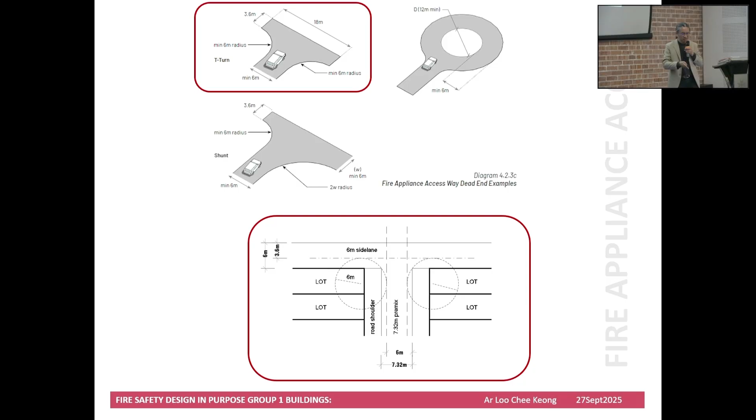Done, right? If it's a 40 feet road, can or cannot? Go back and test, please. 40 feet road, you may have to split this to get the radius you want. Okay? So these are some illustrations in the Red Book.

So here, from the end of the row, just have a little knuckle. At the end of the row, shorten this row. This was done a lot in the 80s and 90s, if you guys notice. Yeah? This gives you the required coverage.

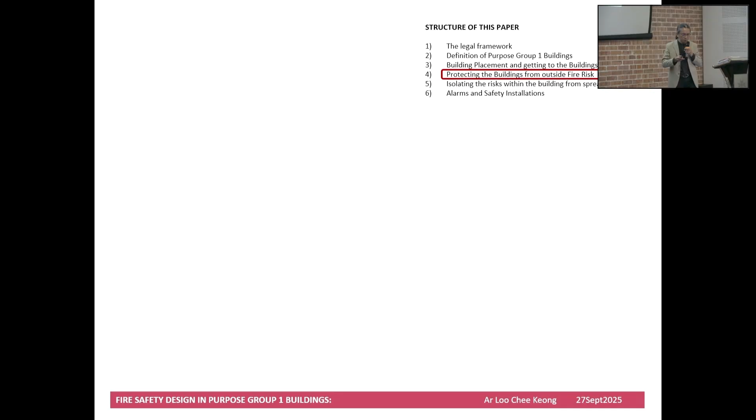Okay. Now we know how to get to the building. So how do we now protect the building? So, Bylaw 225. Every building shall be served by at least one hydrant. And the hydrant that you place cannot be further than 30 meters from the access opening.

All right? So imagine if you have a huge bungalow or land, agricultural land, and somebody, a rich uncle, tells you to build a building in the middle of the land, 5 acres. Where's the hydrant? Outside. So how? Mampus lah macam ni. I got to put the hydrant inside. Inside my private land, how to ask Bomba to take care of the hydrant?

Alright? So now the interpretation when it comes to purpose group 1, that's not how you interpret lah. They are saying 30 meters, but the interpretation is this 30 meters means to the front gate. So in a typical development, hydrant, as long as you hit the front gate, not the front door, you're safe. So that bylaw says 2 things. Number 1, 30 meters. Number 2, hydrant to act as redundancy, 90 meters apart.

Unfortunately, there's no link there. This to this is 90 meters, but do I need to link this to this 90 meters? Of course not, right? At least one has to be 90 meters. Correct? So this guy, redundancy for this fella. This row, redundancy for this fella, for this fella.

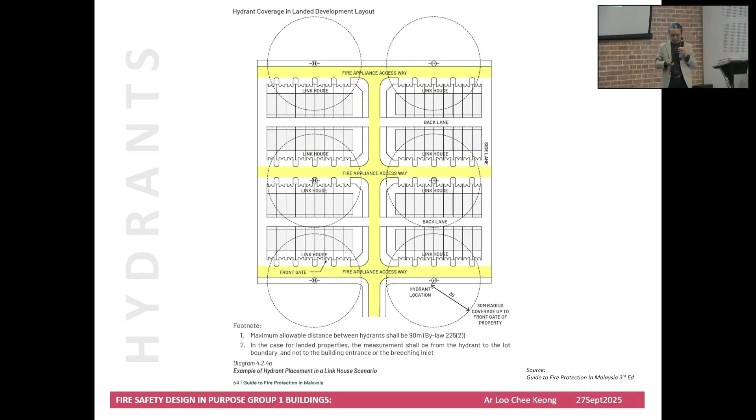If you don't have hydrants, you have to have an additional water source. It can be the lake, it can be whatever. This is for rural areas. Don't design it in the middle of KL and say I'm using the detention pond. Nobody in town is going to allow you to do it. Okay, so what does it mean? This section, 1:15 gradient. My firefighting tender is being parked there, right? This section can be 1:9.

Again, this sort of thing is good to illustrate to Bomba. Every time you submit a plan to them, they will tell you, okay, you have drawn in all your fire hydrants, I want to add one here, add one there. Ask them why. Then you've got to illustrate and explain to them why it's this way. Then your developer will be very grateful to you. Then you can ask for more fees, okay?

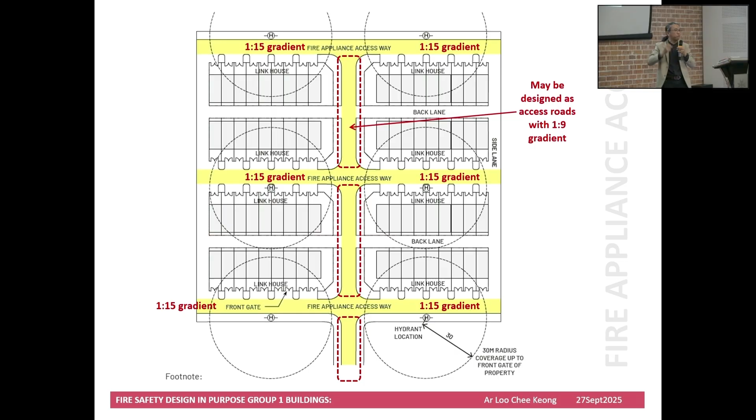Okay, next one we want to talk about. Now you know how to save the fire, basically. Now how do you actually avoid the fire from your neighboring building coming to affect you? So separation of buildings, 6th schedule. You look at the 6th schedule, essentially again in part 7, part 8. You already told me I don't need to comply, you still ask me to look. But at one point in time, you had to look. Why? You look at the 6th schedule.

The 6th schedule is a weird animal. You look at the schedule, there is one section purposely meant for purpose group 1 buildings. If you don't want me to look, don't create it lah. Right? They have forgotten about it. When they amended the law, they've taken it out. Oh no, what am I going to do with it? They actually want you to comply.

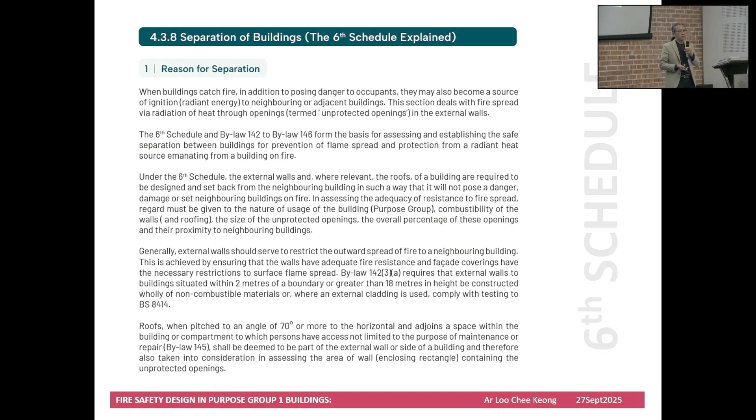All right? So, I won't go through the final details of the 6 schedule. Essentially, you establish a relevant boundary. This relevant boundary, if you have got a title, okay, straightforward. If it's a building sitting in a boundary title, different parties, so normally the boundary becomes the boundary, right? Majlis will actually have set to you all your setbacks. You cannot run away. That's the middle line. If he builds over, he's in contravention.

But when you design, you are designing based on guidelines. So if this is your setback, you have a right to design your building until here. You have no right to design your building until here, because if the building is here, the relevant boundary changes. You are affecting him. Because both parties are using this as the relevant boundary. Right?

Now imagine if this is one title, you have built a building here, your uncle wants you to build another building here. Right? So then you have to calculate the boundary between this building and see how the fire might jump from one building to another building. You determine then your own setbacks within. Council doesn't tell you. 6 schedule come into play. All right?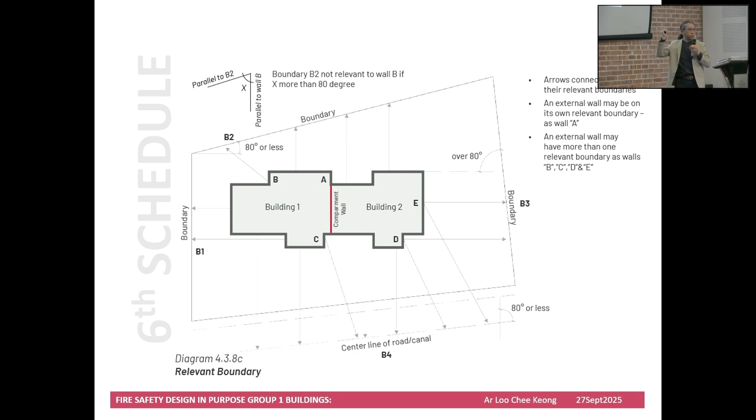So, 6 schedule. Special section for purpose group 1. You get this. What does this mean? When you read it, what does it mean? My building to the other building, correct? No. It's your building to the relevant boundary. It says in fine print. Unfortunately, they name it something like this, confuses the heck out of everybody, but then in fine print say different things. All right?

Okay, now I make you think, how many of you have gone to terrace houses where there's no back lane? Or where the side lane is 4.5 meters? Or where the back lane is 6 meters and Majlis allows you to build all the way to the boundary? Do you think you're going to comply? If now you're talking about 6 schedule. If this is the middle line, no issue lah, right? 2.5, center line of the back lane. So if your back lane is 5 meters, you're building right to the boundary, middle line is 2.5, right? Then you can follow this rule.

Your building length facing that particular relevant boundary, maximum 24 meters. 15 square meters of opening only. So you do the math. If you go full glass upstairs, 2-story terrace house, full glass upstairs, full glass downstairs, you're dead. You don't comply. One door, 3 feet by 7 feet, or if you go by meters, 1 meter by 2 meters is 2 square meters, right?

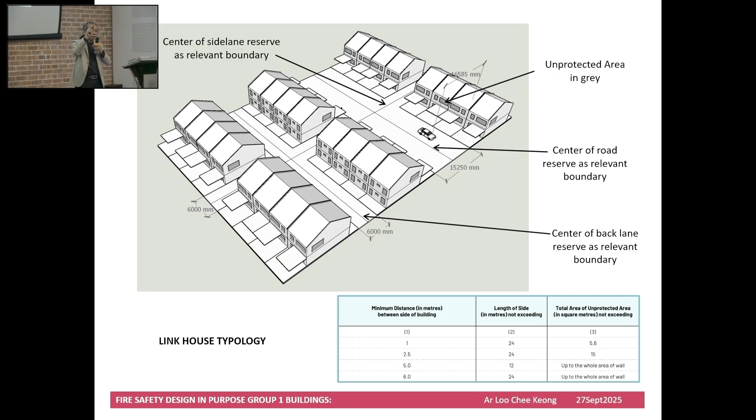So where are all your relevant boundaries? If you look at it, the front is usually more luxurious because the road alone is either 40 feet or 50 feet, right? So your middle line relevant boundary is 25 feet away and you have your own setback, your so-called 6-meter setback before you hit your opening. So quite safe. You should be more worried on zero lot designs, building with no setbacks at the back. Why do I say that?

Okay. Now, you heard me say about self-certification, right? So please keep all your calculations intact. If your neighbor burns down, you comply, he didn't comply, you are safe. You also don't comply, he burns down, you're also culpable for putting your client at risk. Yeah? So these are examples. Not sure whether the slides will go out to you. I hope it does.

Okay, I come back to this 256 again. So now we are talking about isolation of risk. When you talk about isolation of risk, the first important thing is essentially separating walls. It tells you, except for bylaw 134, 141, separating walls in compliance with, this is basically fire rating, 224, fire resistance of element of structure.

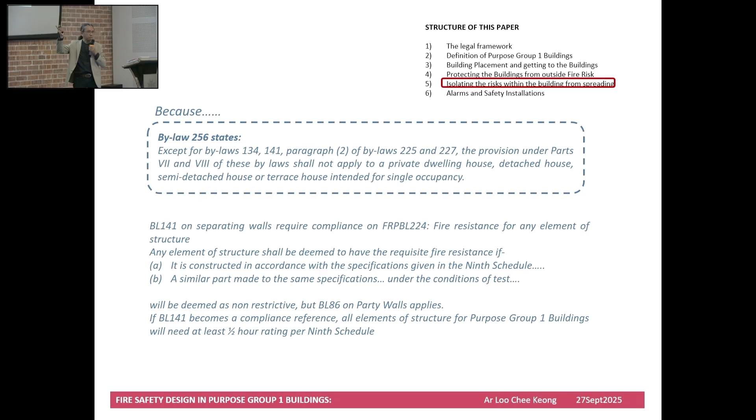You all know what element of structure are? Everything is an element of structure, be it the wall, the floor, the roof and whatnot. It's just that that particular bylaw defines which element you need to fire rate, and at what rate. Certain circumstances require you to fire rate, certain circumstances allow you flexibility, all right? But schedules exist for you to refer to, okay? So because there's separating walls and the issue with party walls, the huge controversy, 2021 puts it back, party wall. Again, confusion.

So we try to get rid of the confusion. Bylaw 86 says, all party walls shall generally be not less than 200 millimeters. I think half of you are panicking in town already because what happened to my high rise? My developer has been telling me 100 mm thick, 100 mm thick RC walls. This now is telling me 200 mm thick.

All right? Masonry construction. RC wall masonry construction? The answer is yes. It's just not stone and bricks. Okay? Or in various thickness, compliance to all these parts and acoustic performance. And where is this bylaw? 86. Nothing to do with firefighting. This is constructional requirement. Who enforces this? Local majlis. But Bomba is telling you we are enforcing it.

Okay? So for purpose group 1 building, this is now absolute. If you have approvals that predate their circular, you are fine. You have approvals that post-date that circular, you are not fine, if a purchaser comes and takes out an issue with you. Okay? Such party wall shall be made of 2 skins if you construct them separately. Why does this law exist?

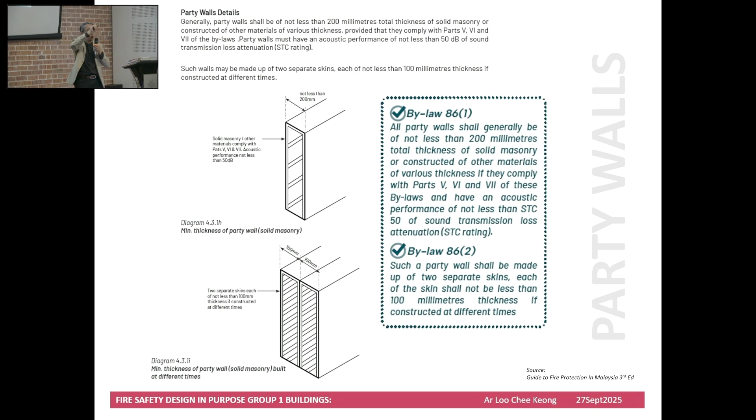In 2012, when they took it out, free for all. Fire certs came out, cement sand brick, 150 mm, complies 2 hours. Actually, like I said, there's no 2 hours. Where is that slide? Anyway, in basically the 9 schedule, the first part of it says, purpose group 1, half hour. Okay? It says half hour. It doesn't say 2 hours. High-rise buildings, 1/2 hour. There's no such thing as 2 hours. Okay? But 2 hours becomes the convenient one. Why? You got to look at the 9 schedule later part where they talk about different materials, what thickness comply to what. Right?

Okay? So, for interpretation of the next bylaw, which is bylaw 86.3, multi-story building. Some smart aleck is going to come and tell me, 2-story terrace house, multi-story building what? Right? As far as Bomba is concerned, no. When we say multi-story building, we mean flats and apartments. Okay? You want to call yourself purpose group 1 building, you comply to this, 200 mm. If you want to call yourself other residential, can you imagine the problem you're going to get? I'm going to impose travel distance on you. You'll be caught in even worse dilemma. Yeah?

Okay? So, that answers the question for you doing high-rise. You can still do that. But don't forget, party walls, like in any other element of structure, you must protect the integrity of the width or the depth. If Bomba and UBBL tells you 100 mm thick, it means 100 mm thick. You cannot encase your electrical conduits. You cannot decide to bore a little bit of hole, put a little bit of other things into it. You just cannot. All right?

Don't let any developer tell you they can. If engineers come to you and say that they can, point them to the UBBL. Where does it say that you can? It tells you uniformly, the whole solid mass must be maintained. Okay? So that illustrates this diagram. If this is 100 mm, you want to have conduits, please thicken. So your electrical conduits on slabs, where exactly is it? It's under, right? How does that compromise your concrete cover? It will compromise your concrete cover.

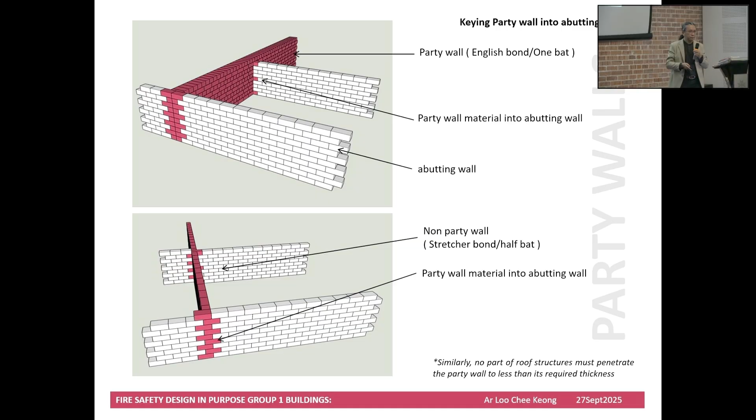Next, after the party wall comes the roof. Roof in the past, this was a big issue, the extension. In the 90s, what happened? In the 90s, some architects decided to tell Bomba, tak cantik ya. So they got away with it. And what did they introduce? T-beams.

T-beams, how is the roof tile going to stay over? Timber battens. Then where's the integrity? The fire is just going to follow the timber batten over to your neighbor. Right? Then Bomba said, no more of this nonsense. Give me back this. And so even structure, it doesn't matter whether yours is a lightweight steel structure or whatnot. Do not hack into this. If you want to hack into this, make sure that it's still maintained at 200 mm.

You go one bat, essentially, a lot of us still specify probably in our drafting office 230 mm, right? You go any thicker, your developer is going to scream at you, why is my script so expensive, so thick. But then again, in the market, you can't even find 115 brick. You'll be hard pressed to get 100 mm thick brick. Right? So be careful. All these things, be careful.

You know a standard English bond or even a stretcher bond, how you lay the bricks and what are the dimensions you allow for your mortar jointing will play a part in all these dynamics. Okay, so specify them properly. Huh?

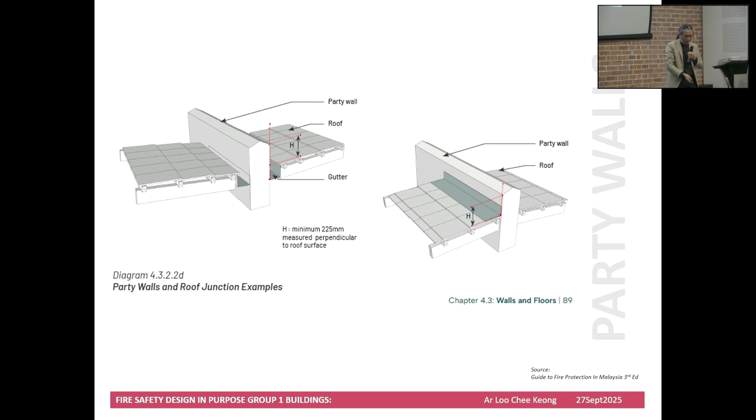If you look at your Uniform Building Bylaw, all your horizontal barriers basically are to protect against the up curl, right? What happens to horizontal next to each other? Does fire do this? The answer is yes. Fire does this as well, but less than this because of convection. Yeah. So we will illustrate that in the next slides. So walls, you know, roofing materials, you know.

Huh? So class 1, class 0 is basically also mentioned. Yeah. Party walls must be non-combustible. Okay, this is the other diagram that you should be very, very concerned about. Especially back lanes, toilets next to each other. If you don't have a nib wall, this will not work. Because this is a deflector wall. There's a certain minimum 450 mm dimension there to stop the fire from here curling over to the neighbor.

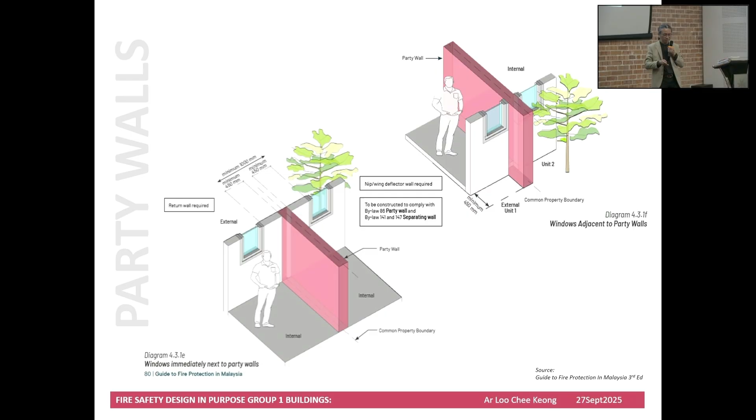When you don't have a deflector wall, the minimum dimension from here to here is 450. So if you can get away with a 100 mm party wall like in high rise, the distance between your window edge to the window edge is 1,000 minimum. But if you are in landed property, 200 mm, please add another 100 into it. Correct or not correct? Okay? Understand, huh? This one? Quite straightforward.

Okay, now, what is then 225, 227? 225 is hydrants. How to fight fire? Hydrants. That's the only thing it says. Fight fire, provide me with hydrants. So because you provide me with hydrants, by right, how to get to hydrants will determine your access. Right? It's a long-winded kind of way to force you to comply. Because I'm a Bomba officer, I've got to fight fire, I must make sure I can get there. All right? And then 227.

These are all active and sensor driven. So now when you submit to Bomba, they will ask two things. Number one, item number 7 is self-contained smoke detector, but for 3-story and above. If you have 3-story, please give me a smoke detector. They don't tell you where to put it, but usually you put it at the highest risk, perhaps the kitchen or somewhere more strategic. Yeah? But you need portable fire extinguishers. It's a requirement. Portable fire extinguisher is a requirement By-law 227.

I have approvals where I go to a Bomba officer, I put it in, he takes it out. Don't ask me why. But if he's going to give me approval based on that, I say thank you very much.

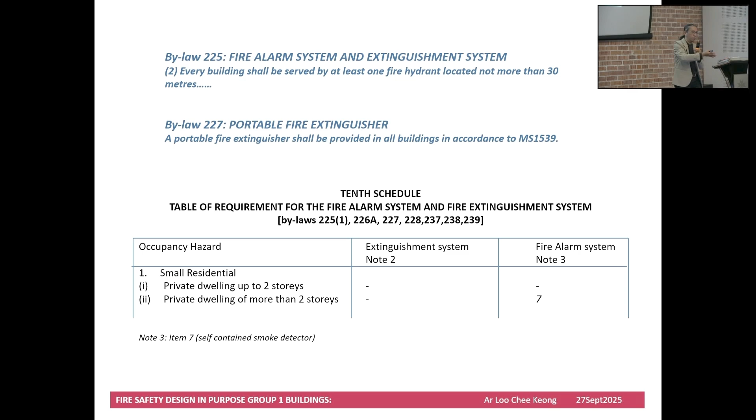You know, it is still happening, but it should not happen because it's law. Once we have this book, everybody knows about it. Give it 3-4 months. We'll be happy to see how everything follows. Now, same thing like what Jason was talking about, C1, C2, C3. C1 is manufacturer, C2 is installer, C3 is supervision, us.

This is the one that the enforcement head was talking about. They forged this. They forged this as well, the whole format. They print their own format. And then when you see the signature, the officer who signed this has already retired 10 years ago.

Don't, at the end of the project, say, oh, happy, I collected my last ringgit, thank you very much, here's my CCC, bye-bye. Don't do that. While the contractor is still on board, get all these things. You're supposed to keep it. Self-certification. Yeah?

Okay. This is an aside. Big issue with firefighting. A Bomba officer comes and tells you your staircase is for firefighting. Actually, no. Purpose Group 1 buildings were never meant to have all their staircases categorized as firefighting staircases. Why? Because of user familiarity. So the requirements are actually a lot lower.

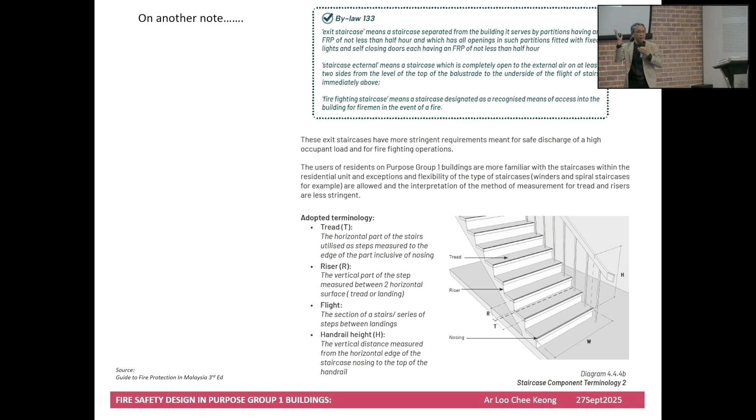And sometimes you do non-straight walls, right? Inclined walls for the step. So all the requirements are now very clear on how to calculate for Purpose Group 1 buildings and staircases inside your duplex. All right? That is not a firefighting staircase, compared to staircases on the outside, meant for firefighting.

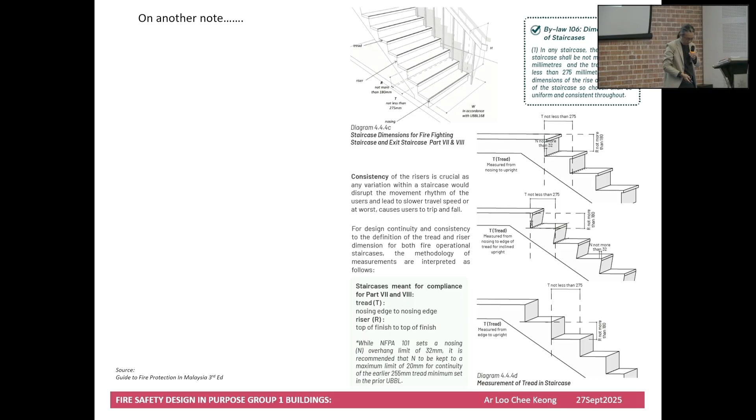So that's why, as a general rule, spiral staircases, winders, irregular staircases are never allowed for firefighting staircases. But they're allowed for residential housing. Okay? I think that's it. Very quickly. I covered everything in 1 hour.